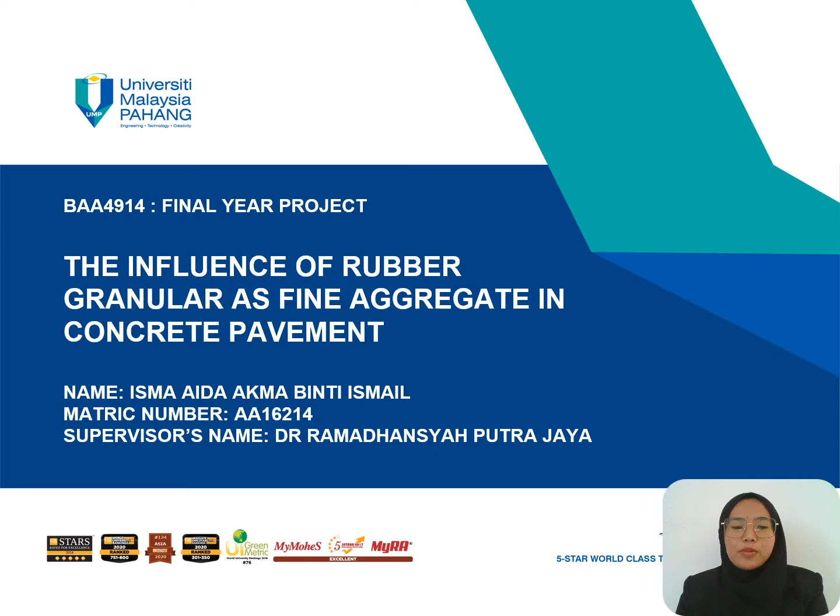The outline of the presentation is introduction and background, problem statement, objective, scope of study, literature review, methodology, results and discussion, conclusion, recommendation and reference.

First is introduction and background of study. Worldwide use of rubber products is increasing every year. Waste rubber can be used as a replacement of fine aggregate in concrete pavement for use in roadways and walkways. Replacing a portion of fine aggregate with rubber granular raised concern regarding shrinkage and cracking of rubberized pavement concrete. It was reported that high content of rubber reduced as much as 90% of the compressive strength of rubberized pavement concrete compared to a control sample of pavement concrete without rubber.

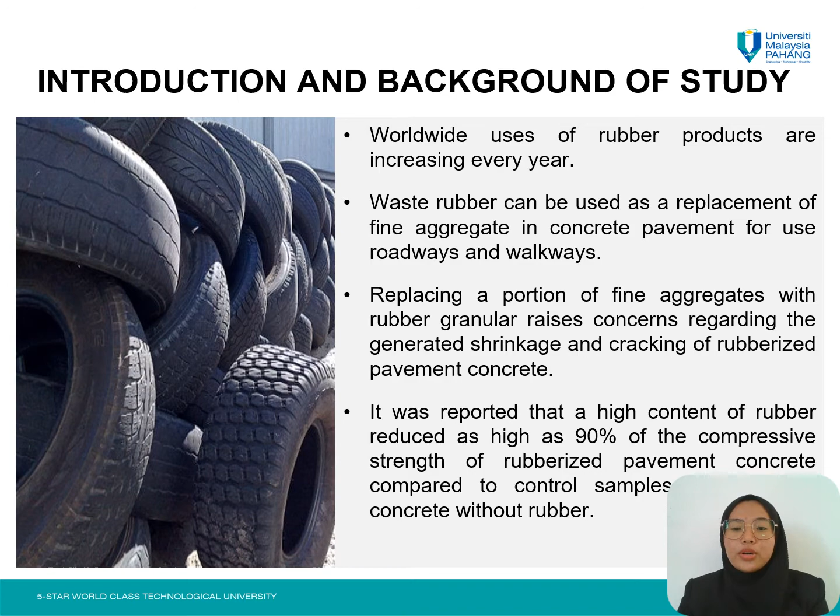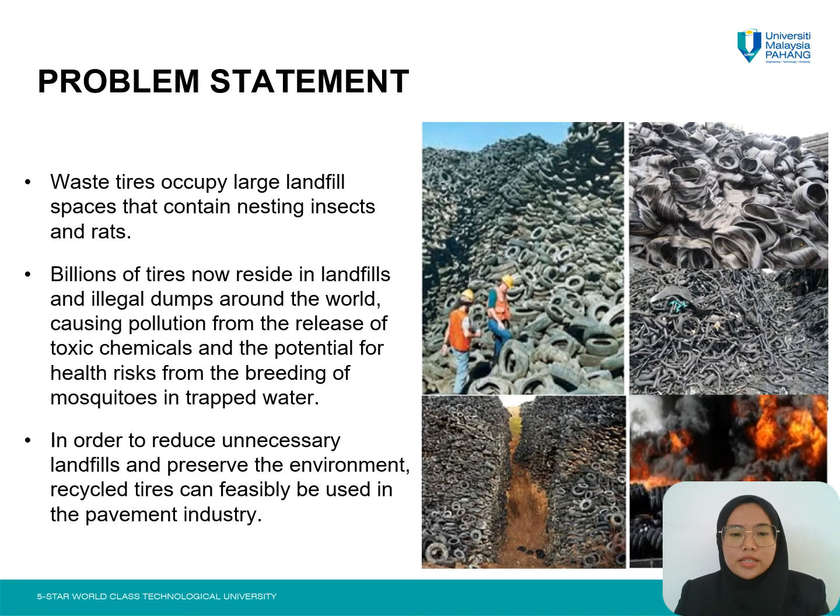The problem statement is that waste tires occupy large landfill space that contains nesting insects and rats. Billions of tires now reside in landfills and illegal dumps around the world, causing pollution from the release of toxic chemicals and the potential for health risks from the breeding of mosquitoes in trapped water. In order to reduce unnecessary landfill and preserve the environment, recycled tires can feasibly be used in the pavement industry.

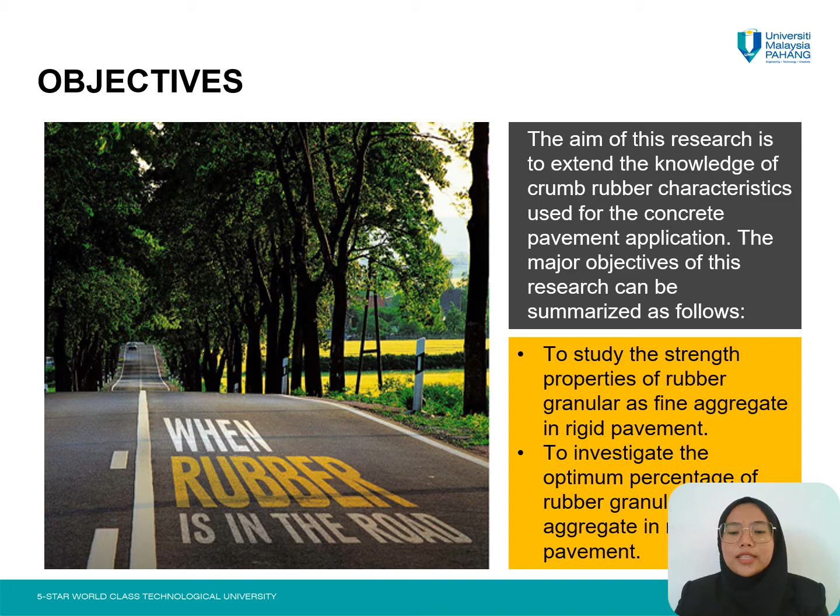The objective is to study the strength properties of rubber granular as fine aggregate in rigid pavement, then to investigate the optimum percentage of rubber granular as fine aggregate in rigid pavement.

The scope of study is focused on crumb rubber concrete, which has provided information regarding rubberized concrete used in pavement applications. In order to minimize the negative effect of adding rubber into the concrete pavement, crumb rubber in the particle size range of 1 to 4 mm was selected. Rubber content with proportions of 3%, 6% and 9% as fine aggregate in concrete pavement. The effects of the crumb rubber inclusion were assessed by comparing mixes to a control mix without rubber, which is 0% rubber content.

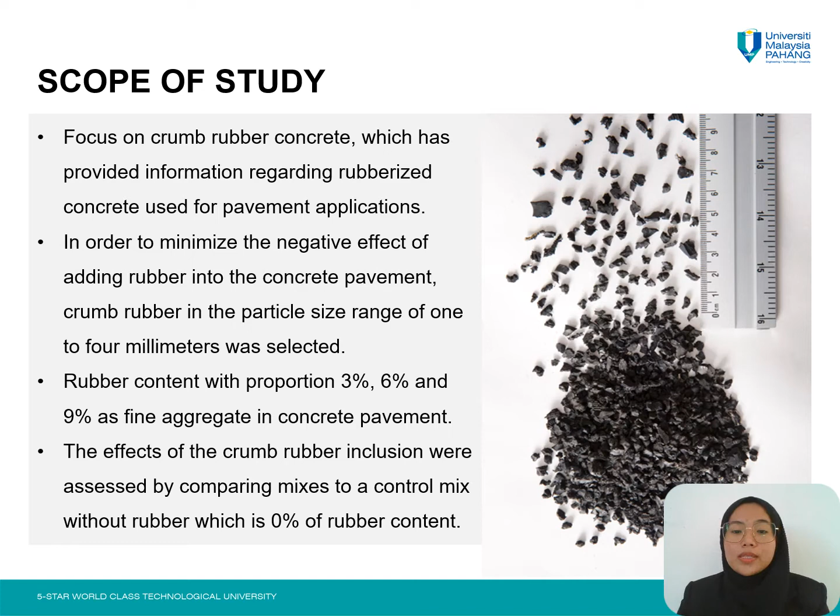This is the literature review and the methodology. First, the sample preparation of coarse aggregate, fine aggregate, rubber granular, ordinary Portland cement and water. Then we will sieve, then mix the material and put it in the cube mold of size 100 millimeter cube. Then curing in water for 7 days, 14 days and 28 days. The tests we will perform are compressive strength, ultrasonic pulse velocity, skid resistance, permeability, and density.

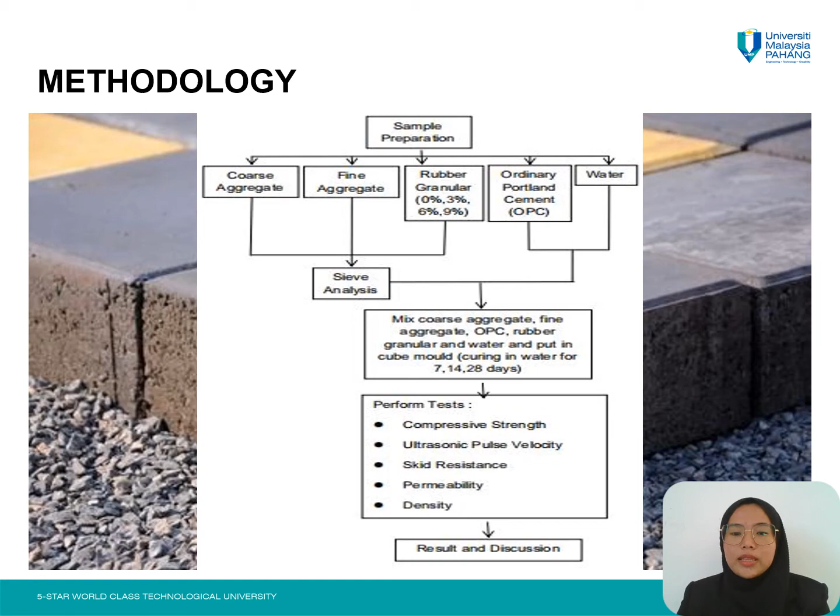For the mix, we will mix the concrete with a laboratory batch mixer. Sampling the cubes for test, store in moist air for 24 hours. Then we will cure the cubes in water for 7 days, 14 days and 28 days. Then we will test the concrete cubes with the compressive strength test, ultrasonic pulse velocity test, skid resistance test, permeability test and density test.

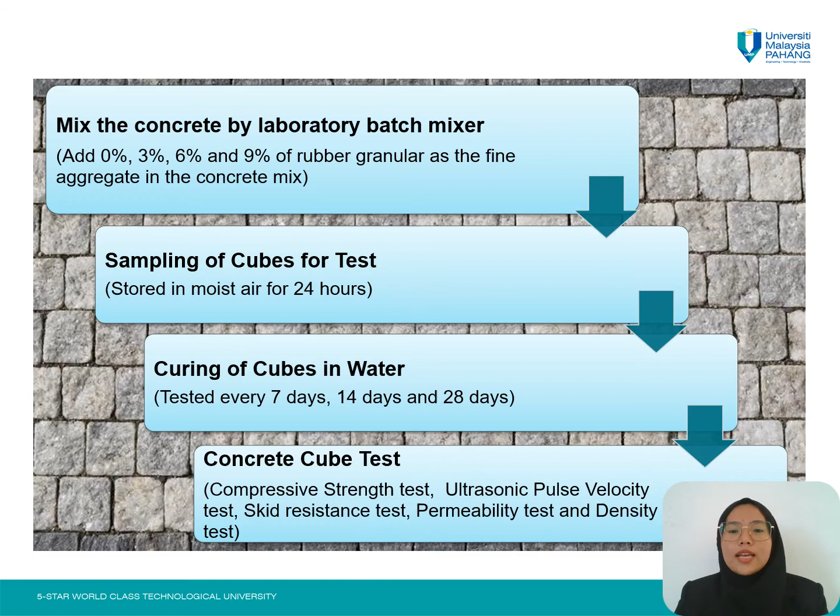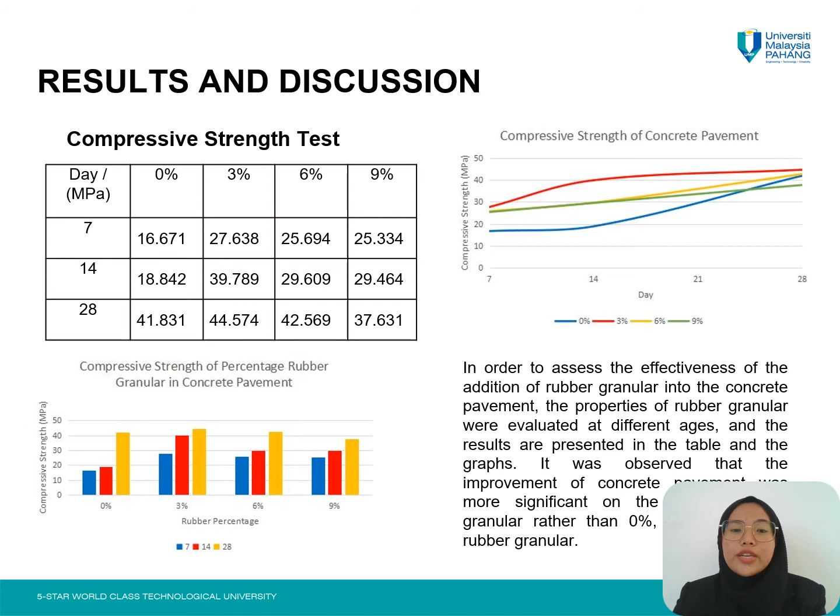Then this is the results and discussion. To assess the effectiveness of the addition of rubber granular into the concrete pavement, the properties were evaluated at different ages, and the results are presented in the table and the graph. It was observed that the improvement of concrete pavement was more significant at 3% rubber granular rather than 0%, 6% and 9% rubber granular.

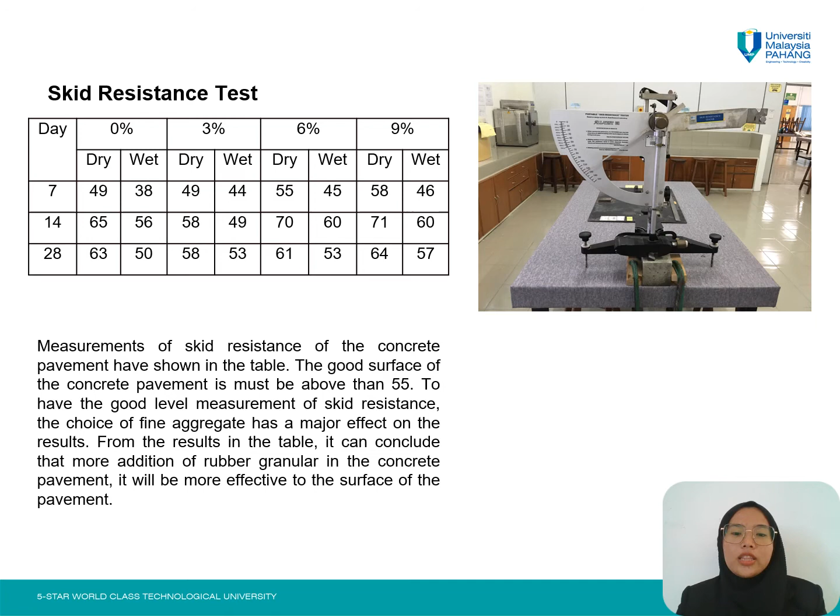Then this is the ultrasonic pulse velocity test. Based on the ultrasonic pulse velocity test result, for 0% and 3% rubber granular added into concrete pavement, the value increased with curing age, while 6% and 9% rubber granular decreased with increase of curing age. Due to the greater contribution of rubber granular in concrete pavement, even at 28 days of curing, the UPV test value will be lower.

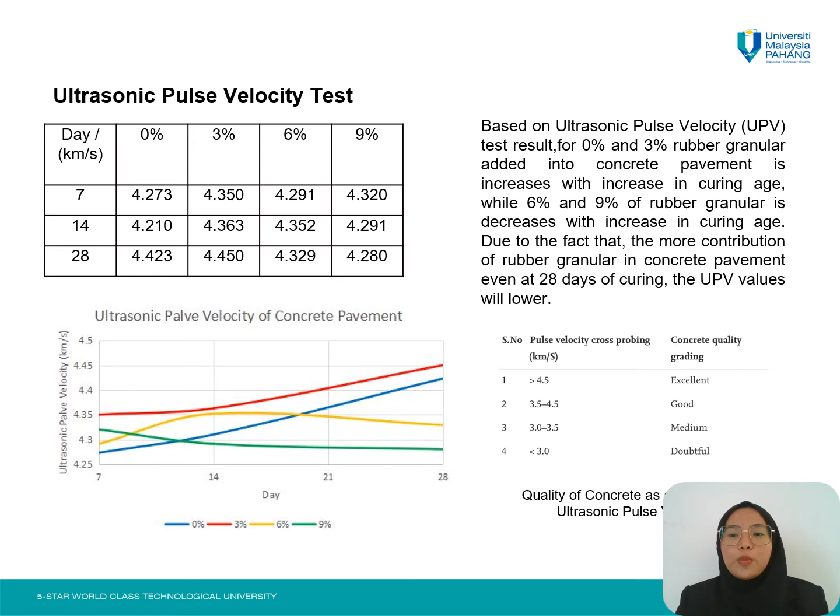Then for the permeability test, the water passed through the pavement concrete is recorded in the table. The table shows that the time recorded decreased when the percentage of crumb rubber increased, which is 0%, 3%, 6%, and 9%, at 7 days, 14 days, and 28 days. This happened because the crumb rubber size is bigger than the fine aggregate size, so it has airways inside the pavement concrete. The water can flow quickly and easily through the rubberized concrete pavement.

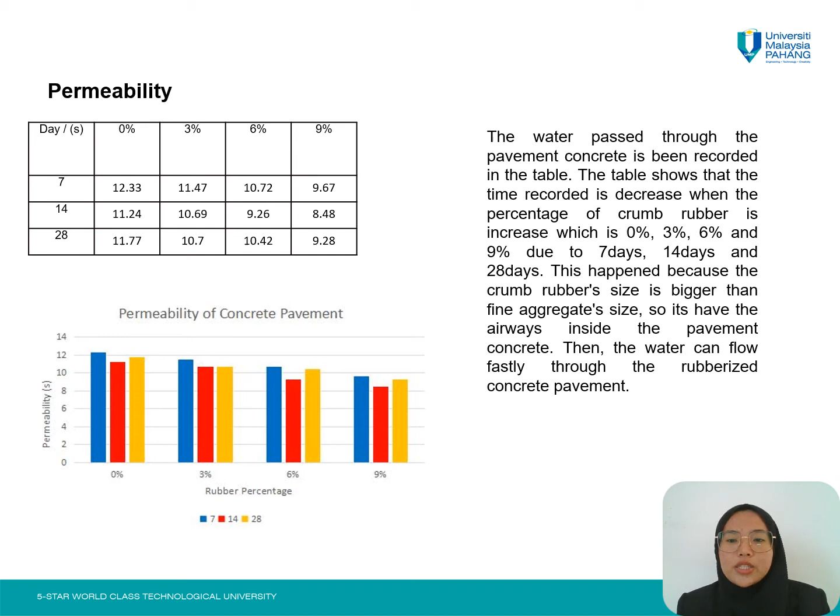Last is the density test. The density of pavement concrete made with different replacement levels of crumb rubber, 0%, 3%, 6%, and 9%, at ages of 7 days, 14 days, and 28 days curing respectively, is given in the table. All concrete pavement cubes produced fall within the range of 1.1 gram per centimeter cube to 1.3 gram per centimeter cube. The density of all the cubes did not fall within the normal range of concrete pavement, which is 2.2 gram per centimeter cube to 2.6 gram per centimeter cube. The result is presented in the graph.

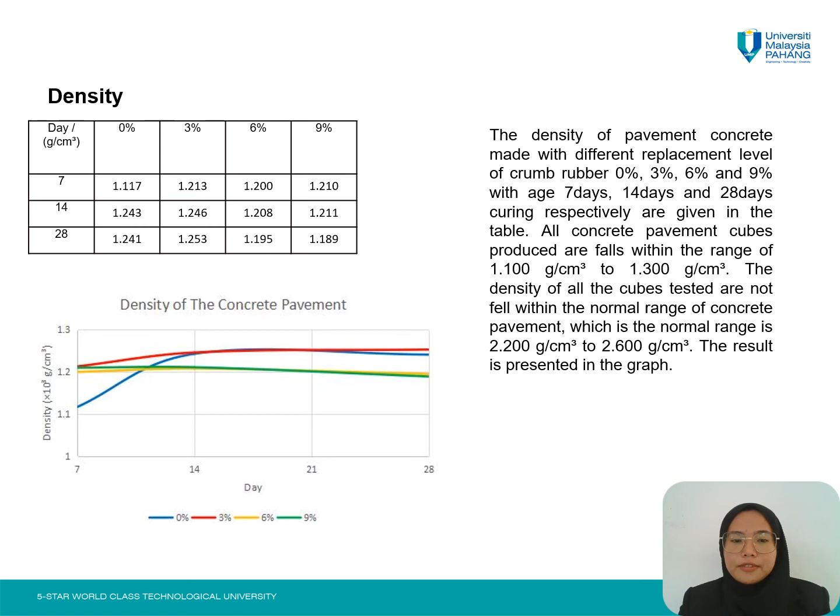So in conclusion, the compressive strength of the concrete pavement is reduced as the percentage of rubber granular in the concrete pavement increases. But at 3% replacement of rubber granular, the compressive strength increased in comparison with 0% rubber granular. The optimum percentage of rubber granular as fine aggregate in concrete pavement is 3%.

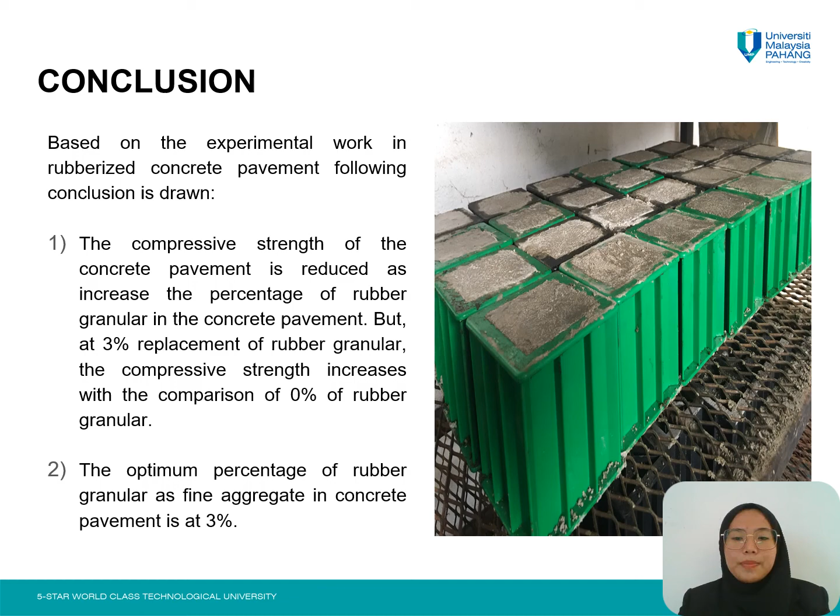For the recommendation, it is recommended that concrete pavement contain crumb rubber up to 3%, which is expected to achieve a target compressive strength of not less than 30 megapascal at the age of 28 days. It is also suggested that crumb rubber could be used in traffic pavement, sidewalks, playgrounds, and other applications. Rubber has the property of sound absorption, which also helps in reducing the sound pollution of heavy traffic roads. The use of rubber can improve the quality and performance of roads. It can also save a certain quantity of natural stone aggregate.